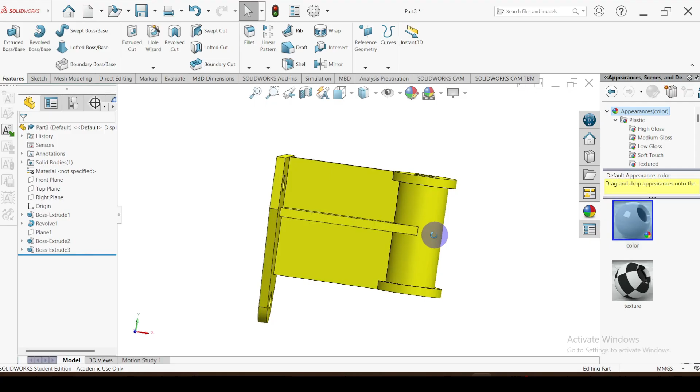Okay, this is the part we are going to create in this tutorial. This is the drawing given for this component. Let's see how to create this part.

Let's close this one. So I'm going to create the new part. Let's take the plain white. The component, let's take the appearance. Click okay. First of all, I'm going to create the mounting plate of the part.

Here you can see this is the mounting plate. This is the part I'm going to create. Here you can see the 76 millimeters, 36, 64. Let's create the part.

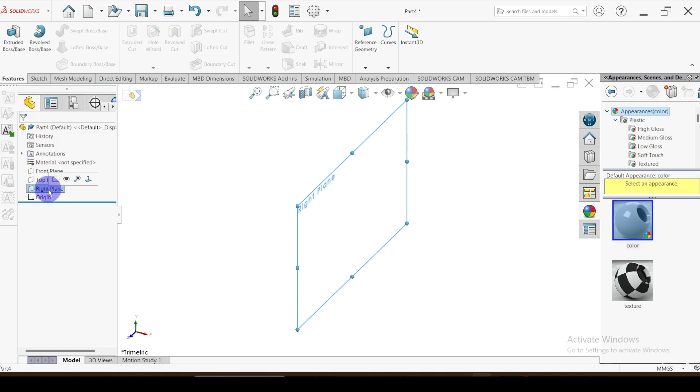Here I'm going to use right plane. Go to sketch. First of all, I'm going to insert the center line, vertical center line. Let's take the infinite line. Then I'm going to use the midpoint line. Let's take the horizontal line.

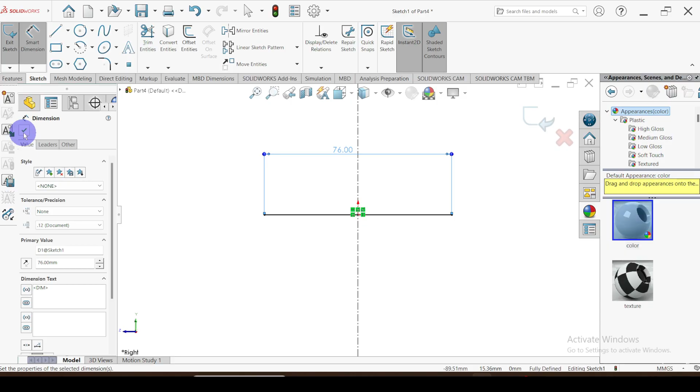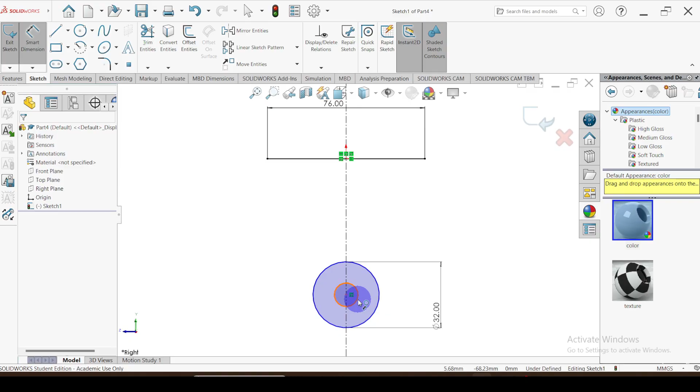Click OK. Then this dimension is equal to 76. Click OK. Let's take the circle. Circle diameter is equal to 32. Then the hole diameter is equal to 12 millimeter.

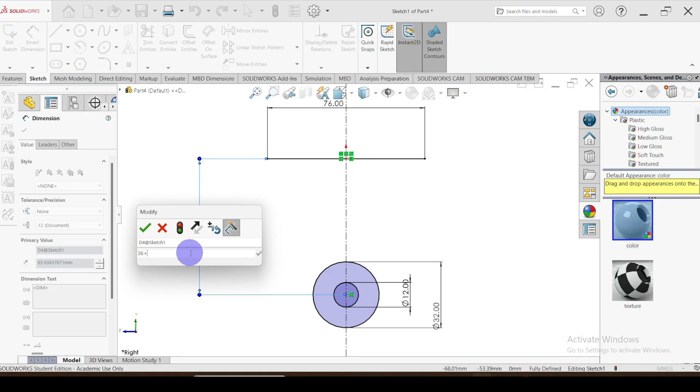Then the total height from the top to the center is equal to, here you can see 36 plus 64. Click OK.

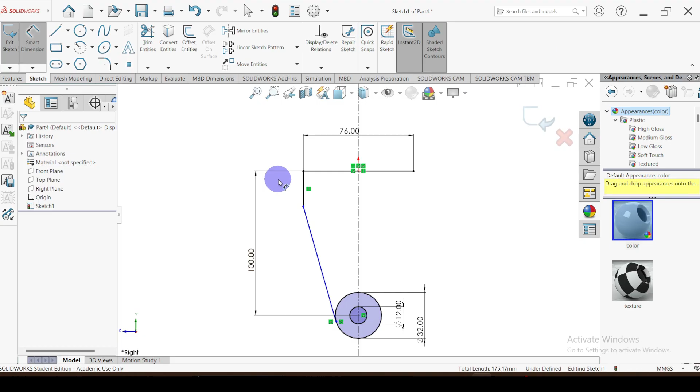So then vertical line, and here. So then this line and this circle should be tangent. Tangent. Then this dimension is equal to 36.

Then there's a hole also. Hole diameter is equal to 12 millimeter. Let's define the hole location. This height is equal to 18 millimeter. Then this length is equal to 16 millimeter.

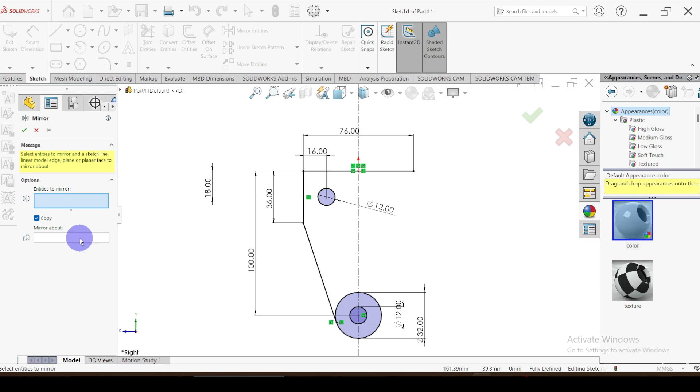So now I am going to mirror these entities around this vertical axis. Click the mirror entities. What is the axis? First of all, I am going to select the axis. See the axis. Then what are the entities? This one, and this one. Click OK.

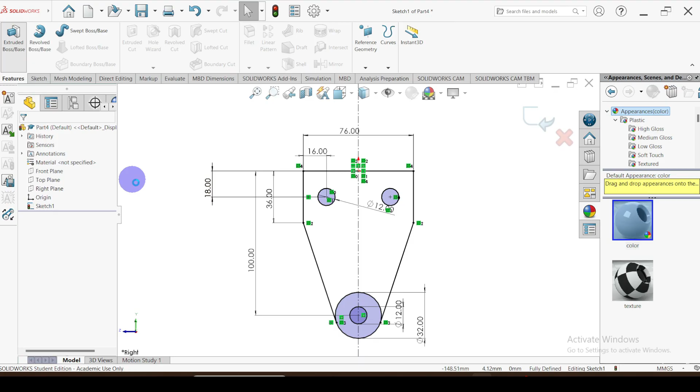So now sketch has completed. You can see the fully defined sketch. So now we are ready to extrude this one. Click extrude. Select the areas to extrude. The extrude thickness is equal to 6 millimeter. You can see. Okay.

Then I'm going to draw this cylindrical part. That is 100 millimeter away from this mounting bracket. You can see. Okay, let's create this one. I'm going to draw it in front plane. Let's take the front plane.

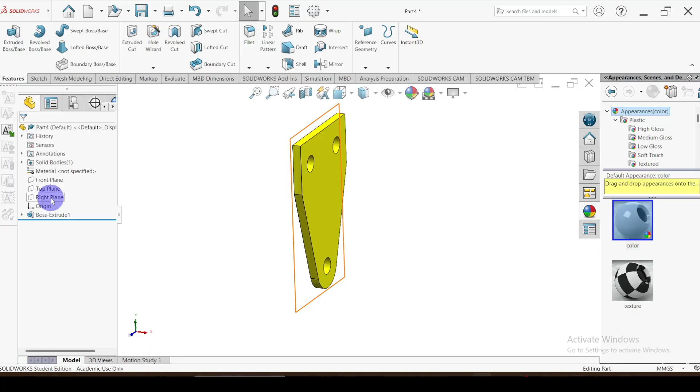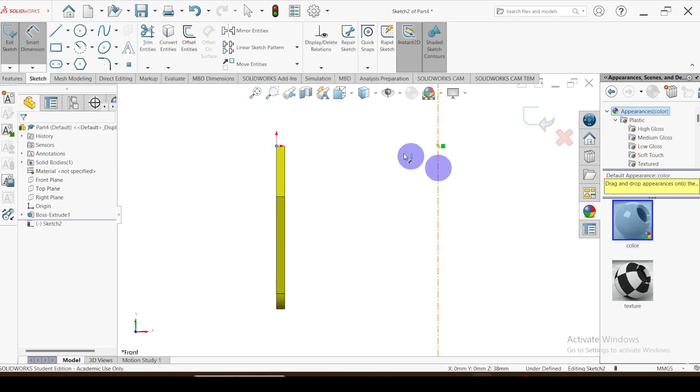Go to sketch. First of all, I'm going to insert the center line, vertical center line, infinite length. That is 100 millimeter away from this web. Let's insert the horizontal line as well. Let's take the infinite line. Click OK.

To create this cylindrical part, we are going to use the revolve command. So I'm going to draw the cross section of this cylindrical part.

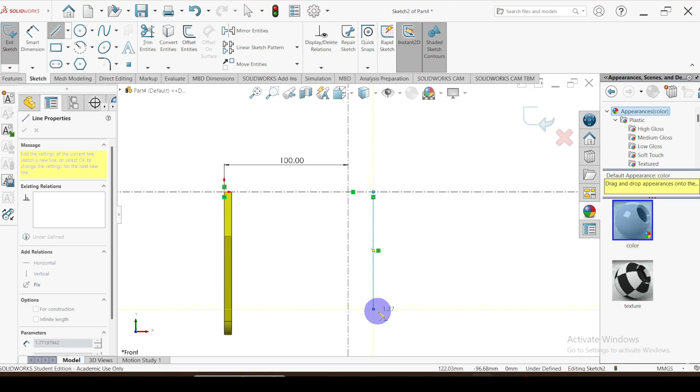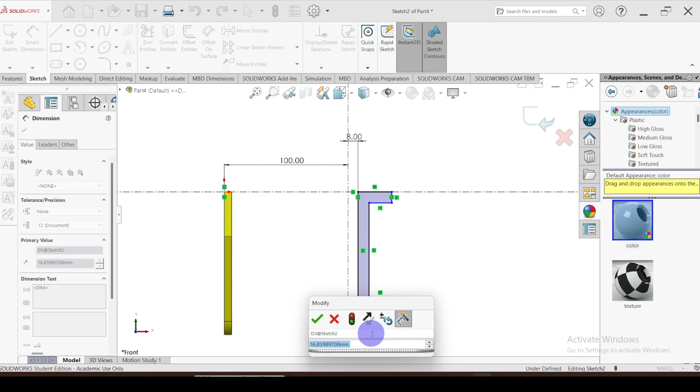Then this dimension is equal to 34 divided by 2. This dimension is equal to 8 millimeter. This dimension is equal to 34 divided by 2.

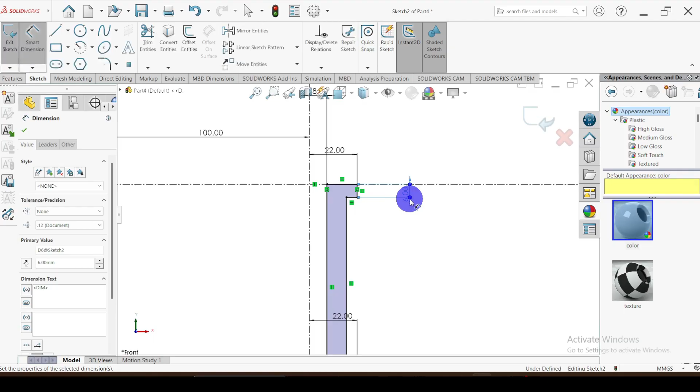Okay, this dimension equal 22. Then thickness is equal 6 millimeter. Here also thickness is equal to 6 millimeter.

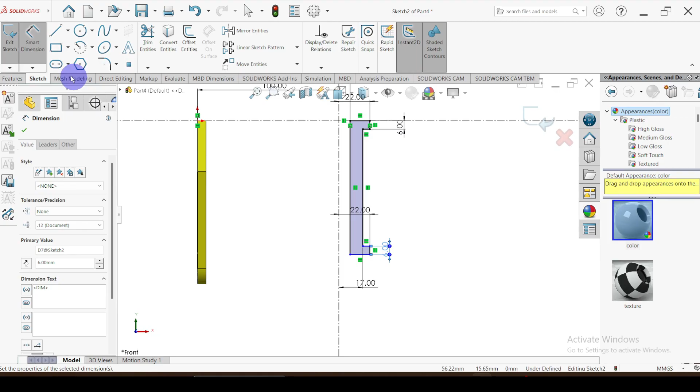So then let's take the height. The total height is equal to 82 millimeter. Now it's okay.

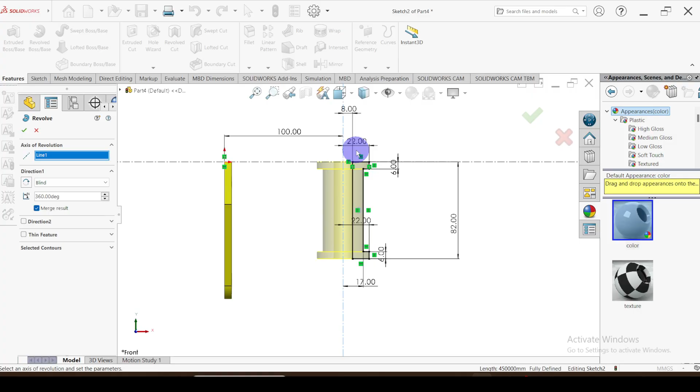Now we are ready to revolve this cross section. Go to the features, the revolve command. What is the axis? Around this axis you can see the preview created. Click OK. Here you can see the part.

So then next we are going to create this horizontal web. This is the one we are going to create. Let's see how to create this one. First of all we need to insert the plane to create this sketch for this web. 35 millimeter distance we are going to insert the reference geometry plane. Let's go to the insert reference geometry plane.

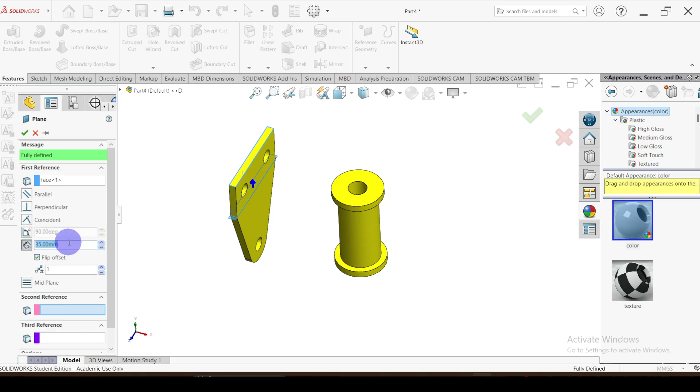Select this face. From this face, 35 millimeter distance. Yeah, already selected 35 millimeter. Click OK. So on this plane we are going to create the sketch. Go to sketch.

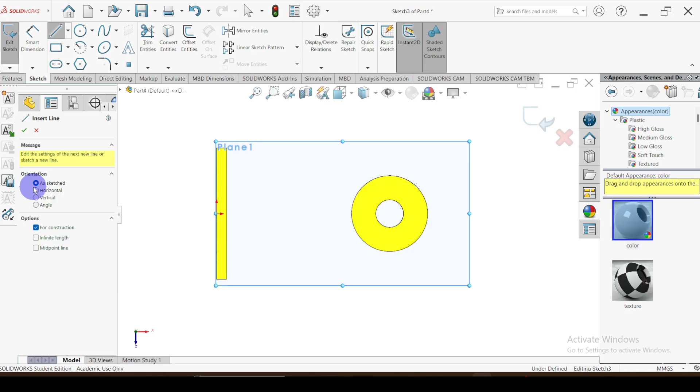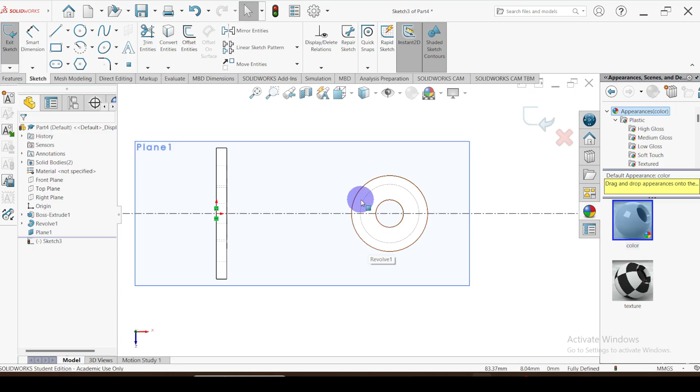First of all let me insert the center line, horizontal center line, the infinite length. Click OK. Let's make visible, let's make hidden line visible. Let's take the line.

You can see this dimension is equal to 25 millimeter, and this line and this circle should be tangent. Click OK.

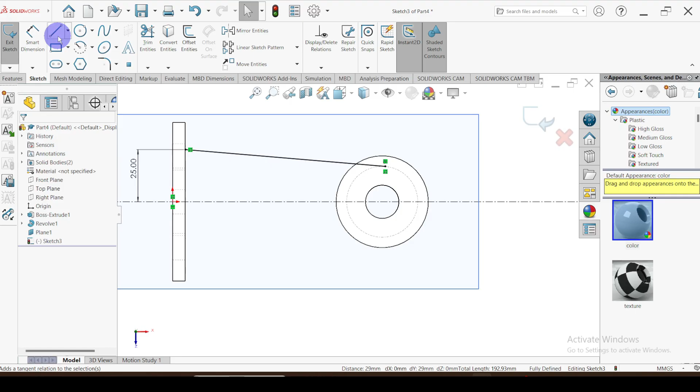So then I'm going to mirror this one. Let's take the mirror about this axis. This is the entity I'm going to mirror. Click OK.

Okay, so let's highlight this one and go to offset entities. So make it 0 dimension. Click OK. Okay, let's connect these 2 points. Let's close the contour. Click OK.

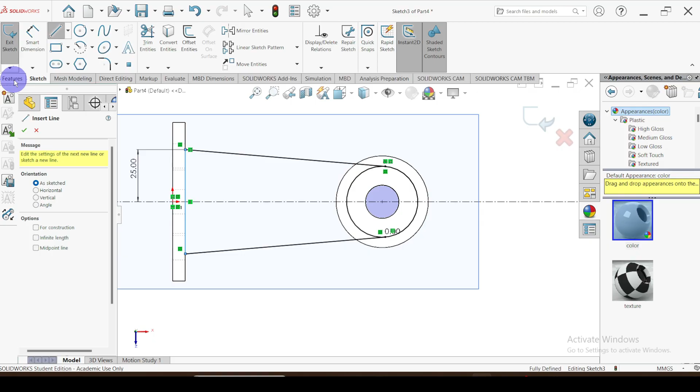So now we are ready to extrude this one. You can see the features extrude. Select these areas. So downward direction 6 millimeter. Click OK.

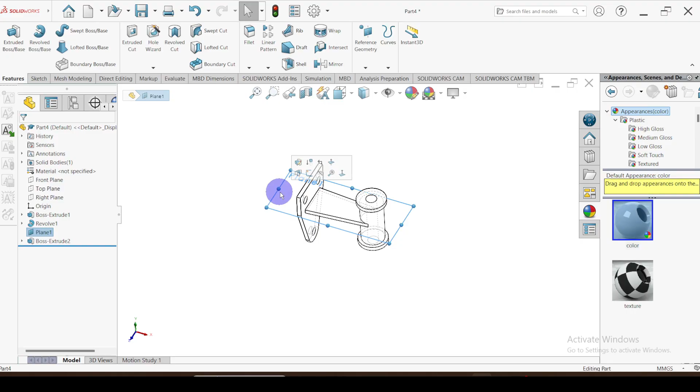Let's hide this one. Okay, this is the horizontal web created.

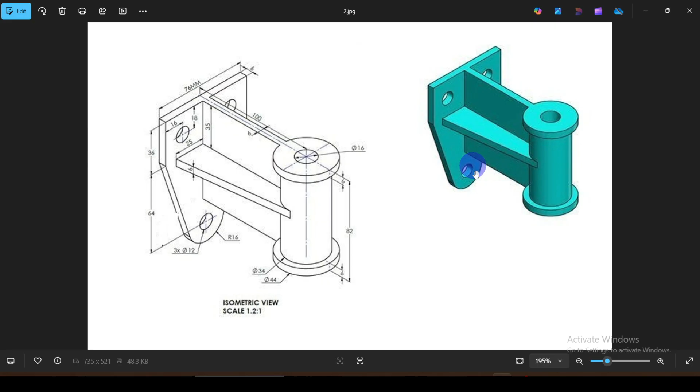So then next we are going to create the vertical web. This one is a rectangle shape. Let's create this one also. So I'm going to create it on front plane. Go to front plane, go to sketch.

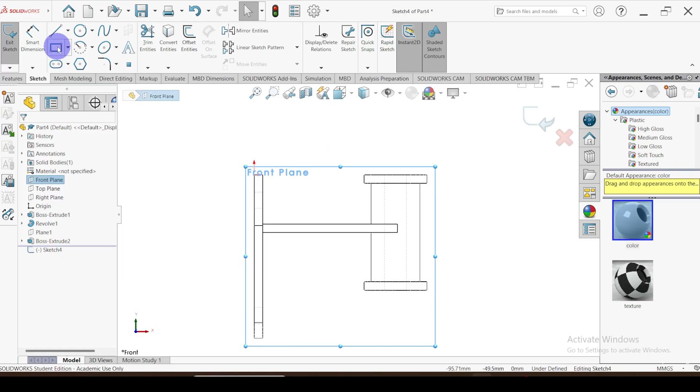Here I'm going to use, first of all let's make hidden line visible. I'm going to use the corner rectangle. Click OK.

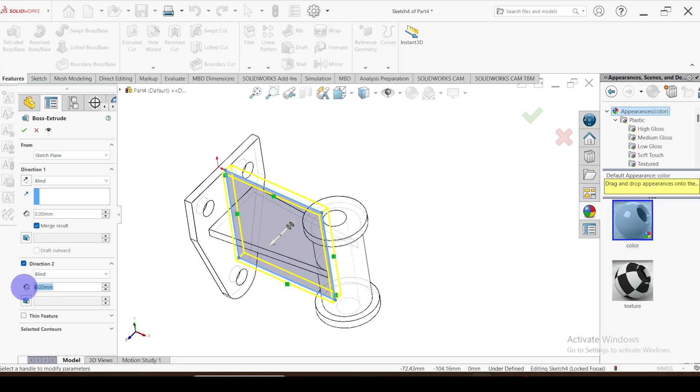Let's go to extrude. Here I'm going to use the two direction extrude. For one direction, there is 3 millimeter, because total thickness of the web is equal 6 millimeter. Now it's okay. Click OK.

Okay, this is the completed part. You can see.